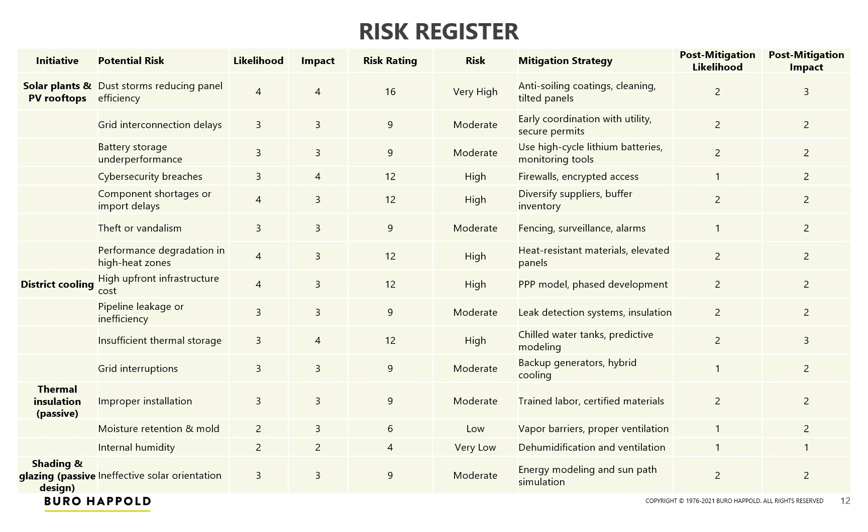We'll start by doing a risk analysis using risk register and risk matrix. A comprehensive risk register systematically identifies potential challenges for each energy initiative. Each risk has a clear mitigation strategy to reduce its impact and likelihood, such as using certified long-life products or implementing secure protocols. Our analysis shows the initial risk distribution with a significant number of risks having high likelihood and impact.

However, with the proposed mitigation strategies, we project a substantial shift towards a low and moderate risk profile, as shown by the post-mitigation distribution. Now we'll talk about the cost analysis of energy initiatives.

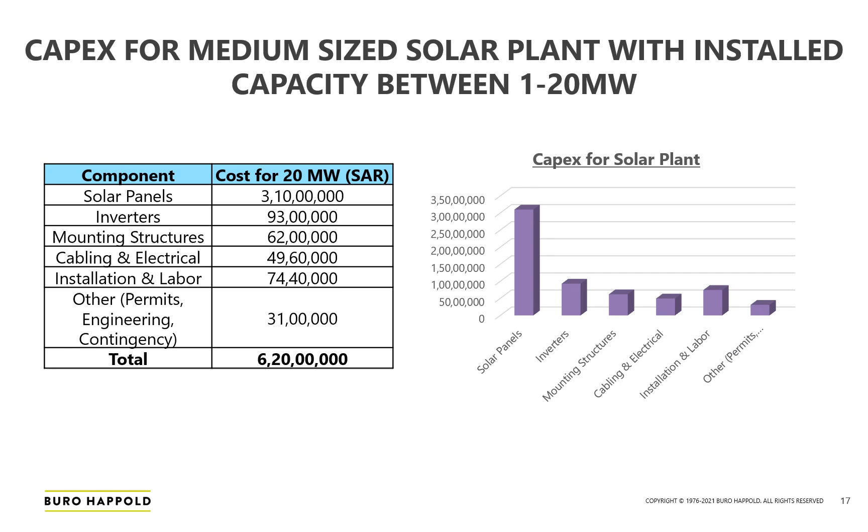To put these initiatives in perspective, a medium-sized solar plant with installed capacity of 1 to 20 megawatts has a total capex around 62 million Saudi riyals and an OPEX of approximately 940,000 Saudi riyals.

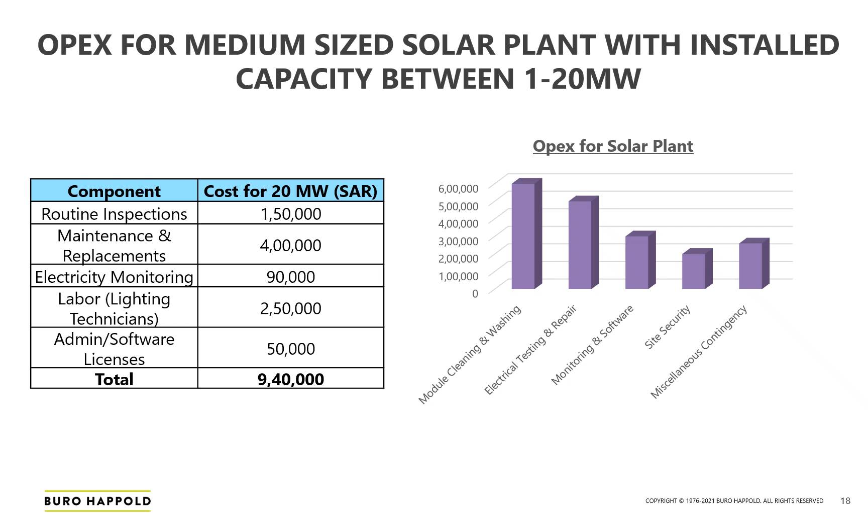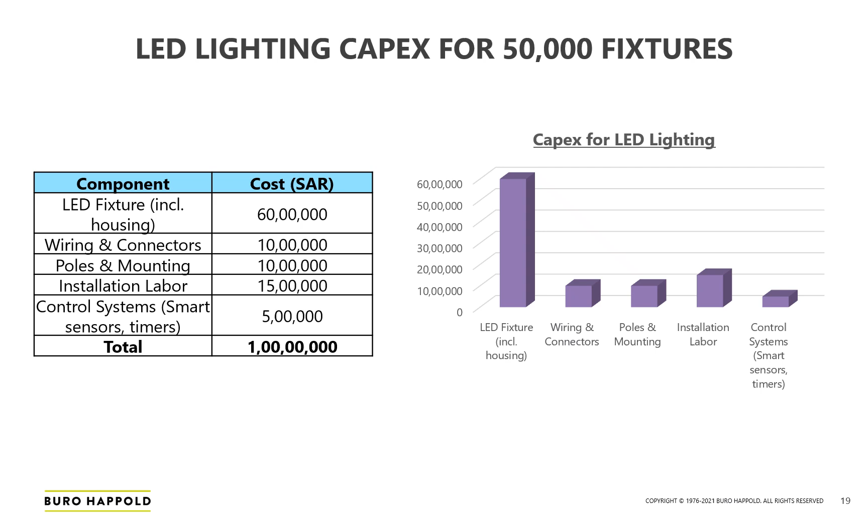For LED lighting, a project involving 50,000 fixtures might incur a total capital expenditure of 10 million Saudi riyals, with an annual operating expenditure of about 5 lakh Saudi riyals for routine maintenance, cleaning, and minor replacements.

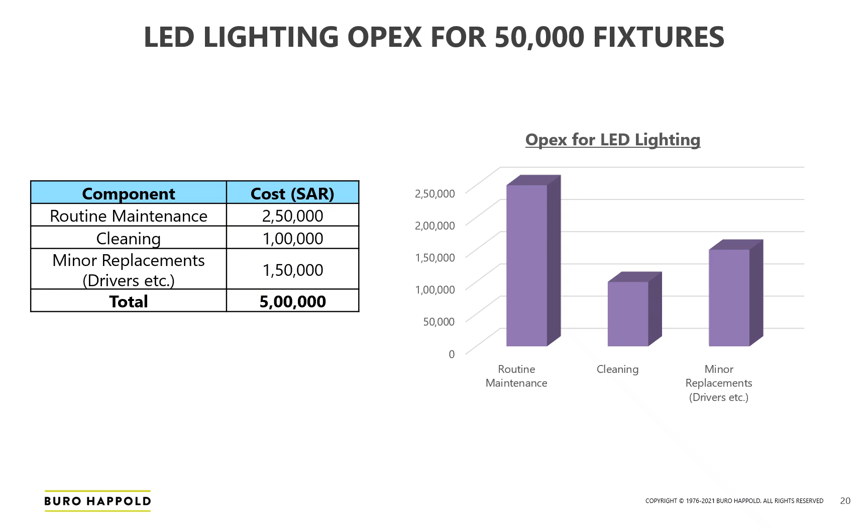This chart visually summarizes the distribution of risk across our energy initiatives. Solar plants and PV rooftops, along with district cooling, currently show the highest number of identified risks, indicating where our focus on mitigation will be most critical.

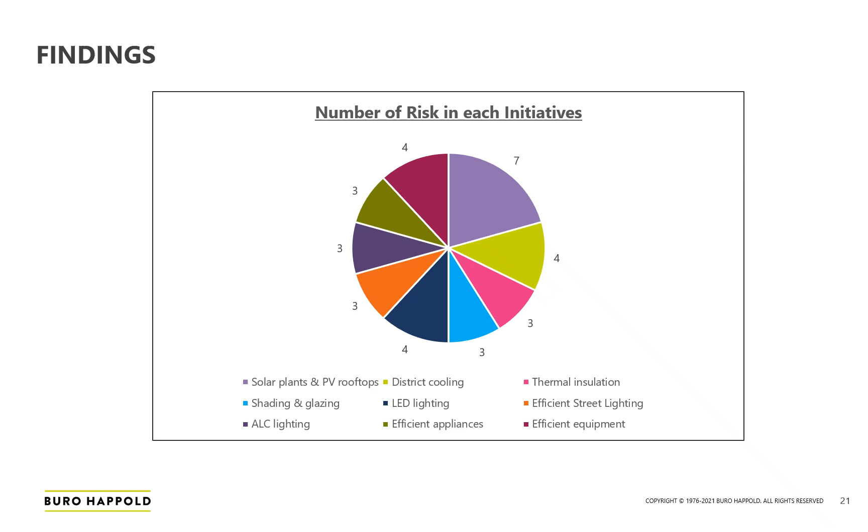Now we'll discuss the potential risks for energy initiatives in brief. Our first risk is grid integration. A primary risk here is increased operational cost for grid operators and potential grid instability leading to blackouts.

To mitigate this risk, Saudi Arabia needs significant investments in smart grid technologies through implementing advanced grid management systems or forecasting tools, or use of hybrid power plants with thermal storage for backups, or lastly deploying utility-scale battery storage, example lithium ion batteries, to store excess solar power and release it when needed.

The total cost of lithium storage battery for a medium-sized plant with solar capacity of 1 megawatt to 20 megawatts, designed for storage of 2 to 4 hours duration, can range up to 660 to 1095 Saudi riyals per kilowatt hour.

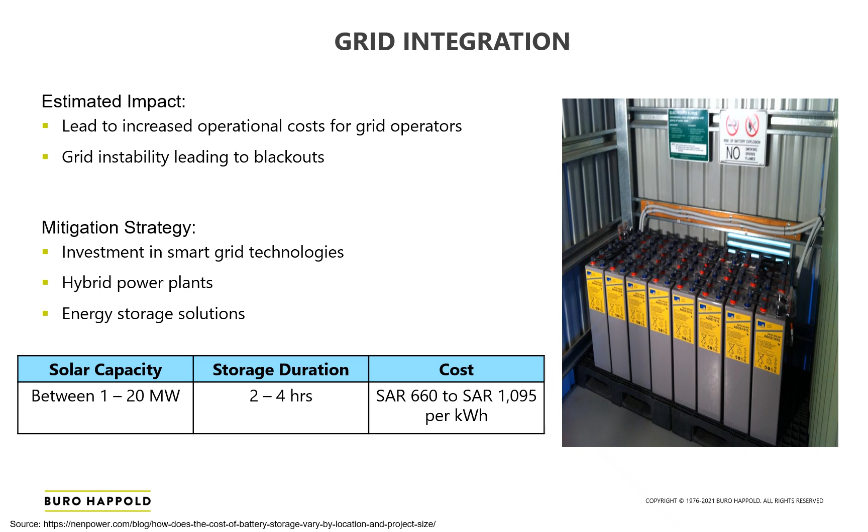Next, for solar capacity, a risk is losing solar power output annually and underperformance against financial projections due to panel degradation. Our solutions include stringent quality control, sourcing from reputable manufacturers, regular performance monitoring, and crucially, using solar simulators for consistent panel testing.

A solar simulator is a specialized laboratory or factory device designed to reproduce the natural sunlight spectrum and intensity for the purpose of testing solar cells and modules. This helps determine a solar panel's electrical performance under standard test conditions. Manufacturers can use them to ensure panels meet specified performance criteria before shipping.

Solar simulators can be classified as Class A, B, and C based on their accuracy. Basic Class C and B simulators can range approximately 73,000 to 367,000 Saudi riyals. However, the high precision Class A simulators can range from 735,000 to 3.67 million.

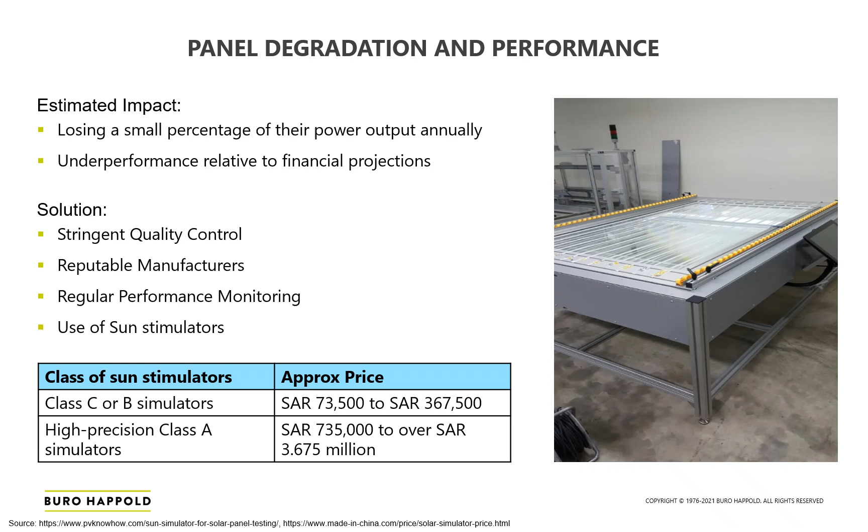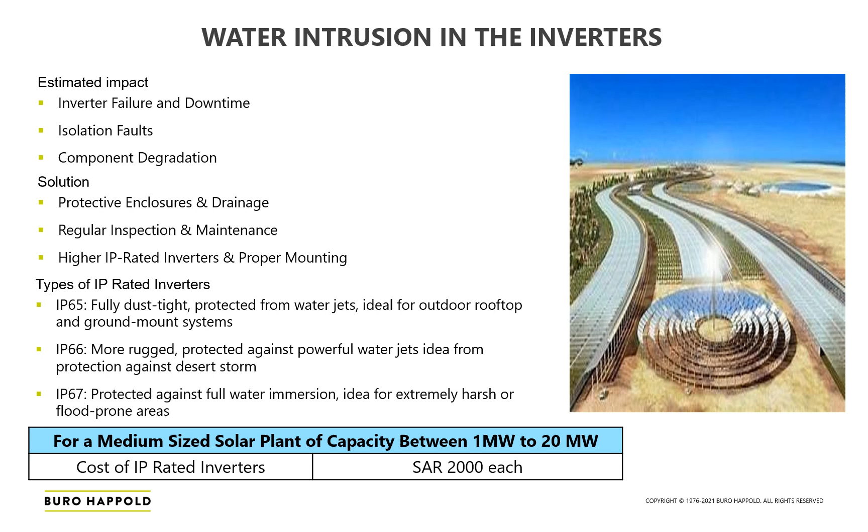Water intrusion poses a significant risk to the inverters, leading to failure, downtime, isolation faults, and component degradation. The mitigation involves selecting higher IP-rated inverters, specifically IP66 for desert storms or IP67 for flood-prone areas, alongside proper mounting and regular inspections. Lastly, a typical IP-rated inverter for a medium-sized plant costs approximately 2,000 Saudi riyals each.

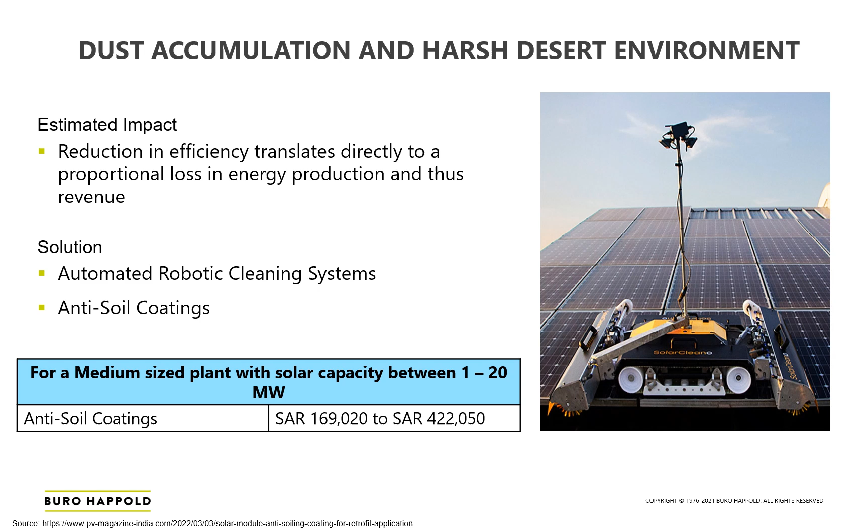Dust accumulation in our desert environment causes efficiency reduction and proportional loss in energy production and revenue. Our solution is twofold: implementing automated robotic cleaning systems and applying anti-soil coatings. For a medium-sized plant, anti-soil coatings could cost between 169,000 to 422,000 Saudi riyals.

Cracks on solar panels reduce power output efficiency and can void warranties. The solution includes using enhanced glass, ensuring International Electrotechnical Commission certification, and utilizing an electroluminescent solar module tester for inspection, with a tester costing approximately 6,000 US dollars.

The EL Solar Module Tester is a crucial diagnostic tool used to identify hidden defects in solar panels that are not visible to the naked eye or through standard visual inspections. It's particularly effective at detecting tiny cracks in the silicon cells, which significantly reduce efficiency and lead to hotspots. It clearly shows broken cells and also reveals any poor electrical connection. Lastly, it also helps in identifying problems like dark cells, which are non-functional areas, and various manufacturing defects.

The tester works by applying an electric current to the solar panel. When electric current flows through the healthy PV cells, they emit light in the infrared spectrum. This IR emitted light is then captured by the high-resolution specialized camera. The captured EL image acts like an X-ray of the solar panel.

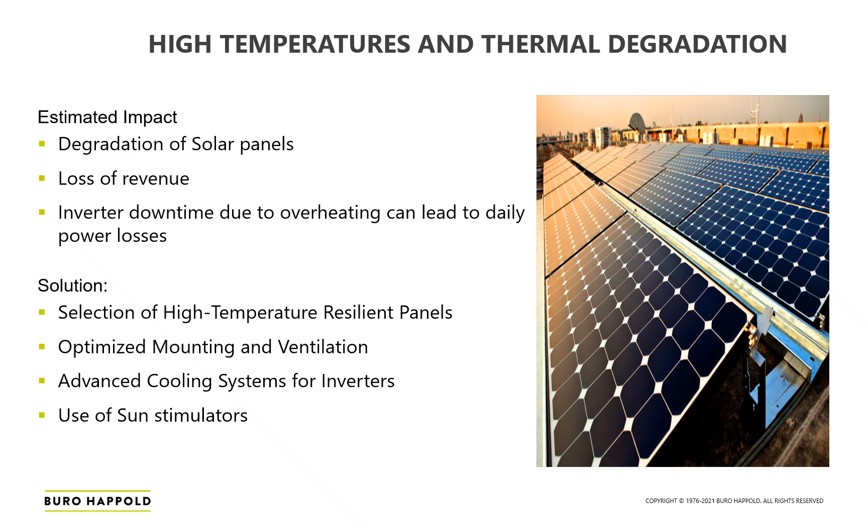High temperatures lead to degradation of solar panels and inverters, resulting in revenue losses and daily power losses due to overheating. Mitigation involves selecting high temperature resilient panels, optimizing mounting and ventilation, and deploying advanced cooling systems for inverters, complemented by the use of sun simulators.

Cybersecurity is a critical risk, potentially causing operational downtime, significant financial losses, reputational damage, and grid stability risk. Our defense includes implementing robust cybersecurity architecture, conducting regular audits and penetration testing, and investing in continuous employee training and awareness.

Specific to LED lighting, a major risk is operational failure and reduced energy savings due to lumen depreciation or sensor failure caused by harsh environmental conditions and dust. This leads to degradation, loss of brightness, and reduced output. Mitigation includes deploying automated cleaning systems and specifying certified long life, robust EX-proof LED lights designed for extreme conditions.

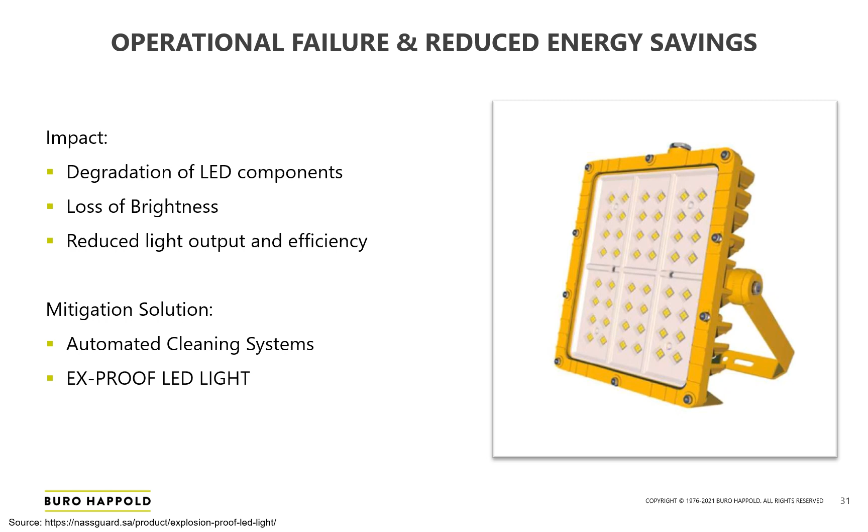These LED lights are built with high strength, corrosion resistant material to withstand the harsh conditions. LED technology provides bright illumination with low energy consumption, reducing operational cost. It is designed to minimize heat emission, reducing risk of overheating. Lastly, it's built for longevity, reducing maintenance frequency and cost.

Lighting also carries the risk of light pollution impacting human health and ecosystems. Our solution is intelligent lighting design and fixture selection, emphasizing shielded and directed light like the Schréder Avento street lighting solution to ensure light goes only where it is needed.

Today, I'll present our key findings on material sustainability initiatives in Saudi Arabia. As part of our risk management analysis, I focused on three critical materials initiatives that align with Vision 2030 and offer significant environmental benefits. Let me start with our three core initiatives.

First, recycled steel using electric arc furnace technologies with scrap metal versus conventional steel, with a 44 to 48% cost reduction and 70% CO2 emissions reduction. The Saudi scrap export ban ensures reliable local supply. Second, recycled concrete involves reusing demolition waste as aggregate. SIRC has invested 160 million SAR in this sector, achieving 5 to 10% CO2 reduction with optimal performance using 25% recycled concrete aggregate.

Third, local sourcing targets the 160 plus billion-dollar Saudi building materials market, reducing transport emissions by 0.05 to 0.1 tons CO2 per ton. While it has strong Vision 2030 government support, we face supply capacity constraints that need addressing. Our risk analysis identifies key challenges across all initiatives.

For recycled steel, market price volatility is mitigated through long-term supplier contracts and hedging mechanisms. Quality inconsistency risks are managed through enhanced quality control systems and supplier certification programs. Local sourcing faces supplier capacity limitations, which we address through development programs and capacity building initiatives. Recycled concrete processing costs are managed through economies of scale and technology advancement.

The financial structure shows recycled steel requiring 50 million CAPEX with 50 million annual OPEX, delivering strong returns. Local sourcing needs 75 million CAPEX for supplier development with 20 million OPEX. Recycled concrete requires 35 million CAPEX for processing equipment with 18 million annual operating costs. Total portfolio investment is 160 million SAR, generating substantial positive NPV.

I'm Mohammad Hadi and I'll be presenting this assessment of sustainability initiatives and my focus would be on mobility. So firstly, let's go through the executive summary of my assessment. So this report consolidates the major risks associated with implementing the mobility initiative across the Kingdom of Saudi Arabia.

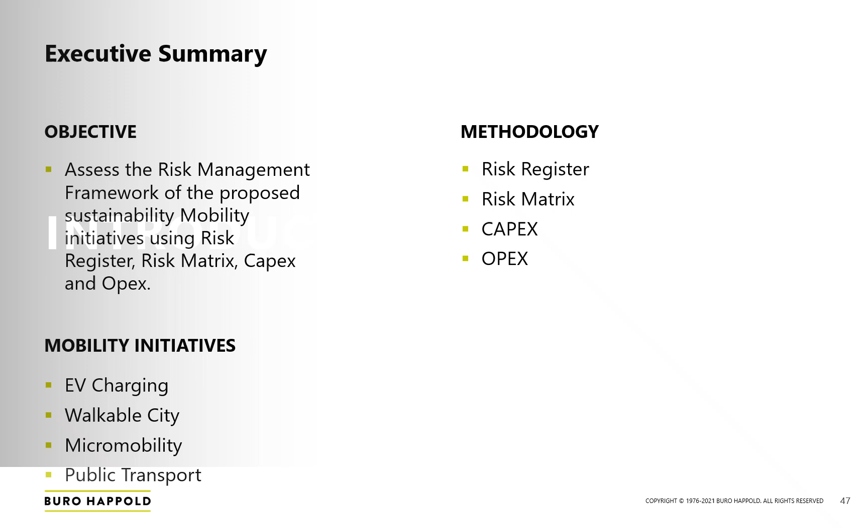So our objective is to assess the risk management framework of the proposed sustainability mobility initiative, and we will be using risk register, risk matrix, and capex and opex. So the initiatives which we are going to assess are EV charging, walkable city, micromobility, and public transport. Let's move on to our introduction.

So, why are mobility initiatives important? So, firstly, it aligns with Vision 2030. The Kingdom of Saudi Arabia has a Vision 2030 which calls for diversifying the economy, enhancing quality of life and reducing dependence on oil, and mobility initiatives are cornerstone to modern infrastructure to promote sustainable cities, even improve public health.

Then we have environment sustainability, in which mobility initiatives such as EV, micromobility, and walkable public transport will all reduce greenhouse gas emission and air pollution and fossil fuel consumption. Then the traffic congestion and urban efficiency. There are major cities like Riyadh and Jeddah which face growing congestion due to urban sprawl and car dependency. So the public transport and walkable infrastructure would really help to ease the congestion.

And then there's public health and livability, where active mobility options would improve population health and encourage social cohesion, such as encouraging walking and cycling. As we can see, these all have benefits. So, firstly, our carbon emissions are going to be reduced, and there's going to be job creation in transport services, clean tech and maintenance.

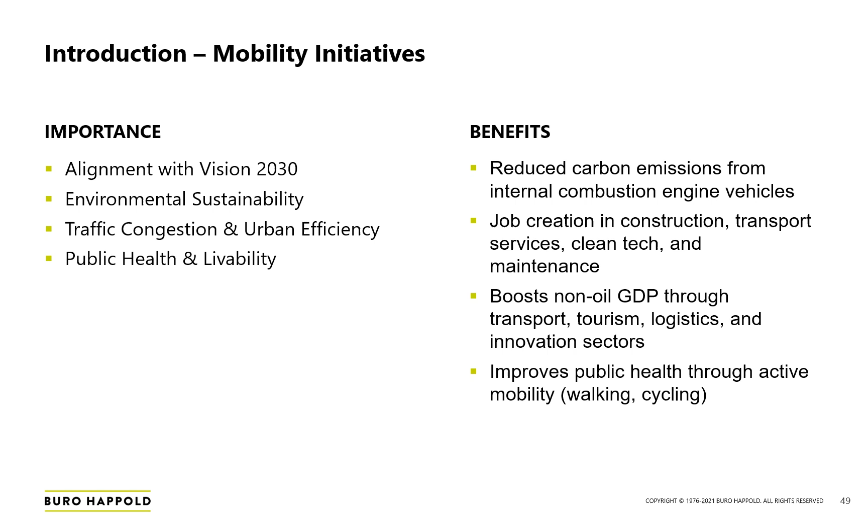And then we are also trying to boost non-oil GDP through transport, tourism, logistics, and innovation sector. Then it will also improve the public health, as I said before, via walking. It will encourage walking and cycling. So moving on to my risk analysis, I'll be discussing two components in this part. It will be risk register and risk matrix.

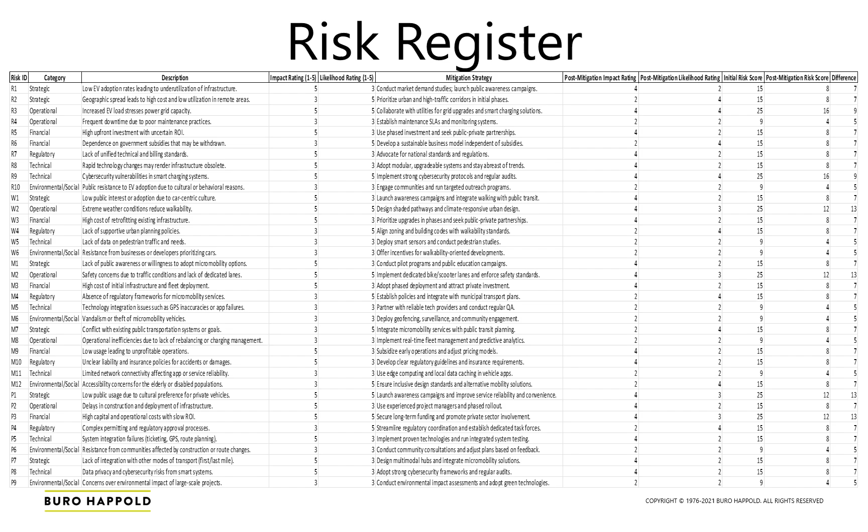Quickly, so this here is the risk register for all my four initiatives. In the risk IDs, R represents the EV charging, W represents the walkable city, M represents micromobility, and P represents public transport. So here I have risk IDs, risk descriptions, likelihood and impact, and then their mitigation strategies. Then I have post mitigation strategies, and we can also see the initial and post mitigation risk score and the difference in that.

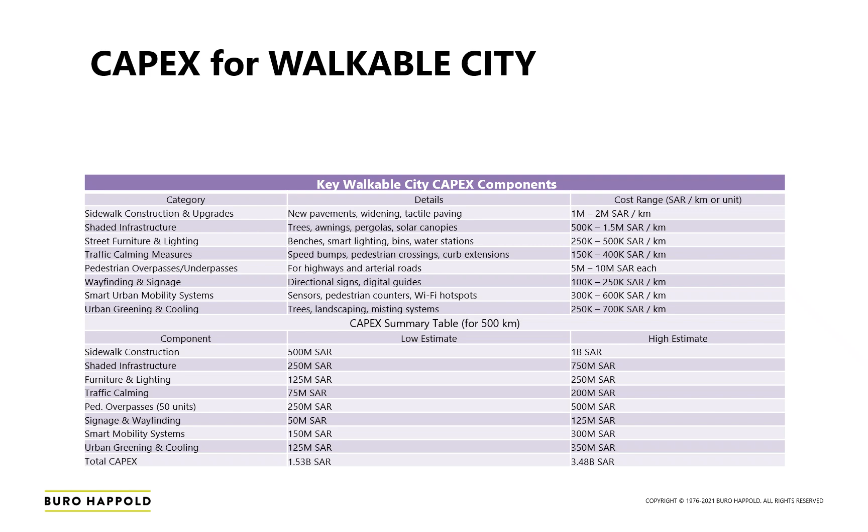So this right here is capital expenditure for walkable city. So first we can see that there are key walkable components, each listed differently, and then we can see the capex summary table. So this is basically for 500 kilometers. I've assumed that I'm making a walkable network across KSA for 500 kilometers. So this cost is for that, and we have a low estimate and a high estimate. So the total capex cost for making a walkable city in the Kingdom of Saudi Arabia of 500 kilometers varies from 1.53 billion Saudi Riyal to 3.48 billion Saudi Riyal.

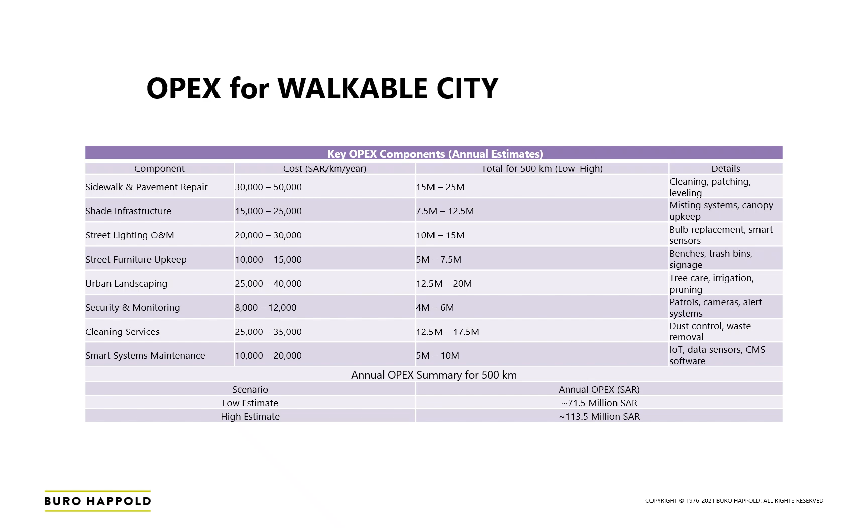So here is the OPEX for walkable city, and we can see each component separately with cost in Saudi Riyal per kilometer per year, and also total for 500 kilometers. The details for each component are also given, like what type of maintenance, for example, in pavement there can be cleaning, patching, or even leveling. So the annual OPEX summary for 500 kilometers, the lowest estimate is 71.5 million Riyal, and the highest is 113.5 million Riyal.

So this right here shows the OPEX for different cities like Riyadh, Jeddah, and Dammam. So say we need to make 200 kilometers of walkable track in Riyadh. What is it going to cost, the OPEX? And it even shows the cost of each different component and the low and high cost. So we can take a look and plan accordingly.

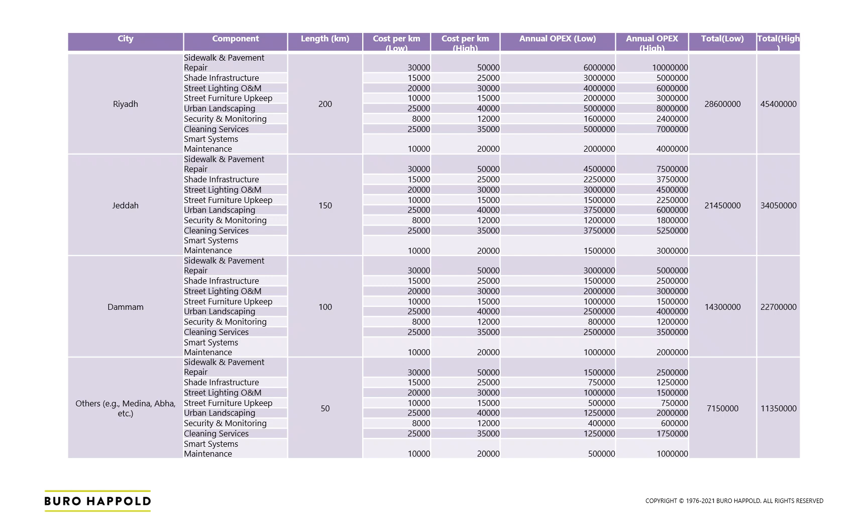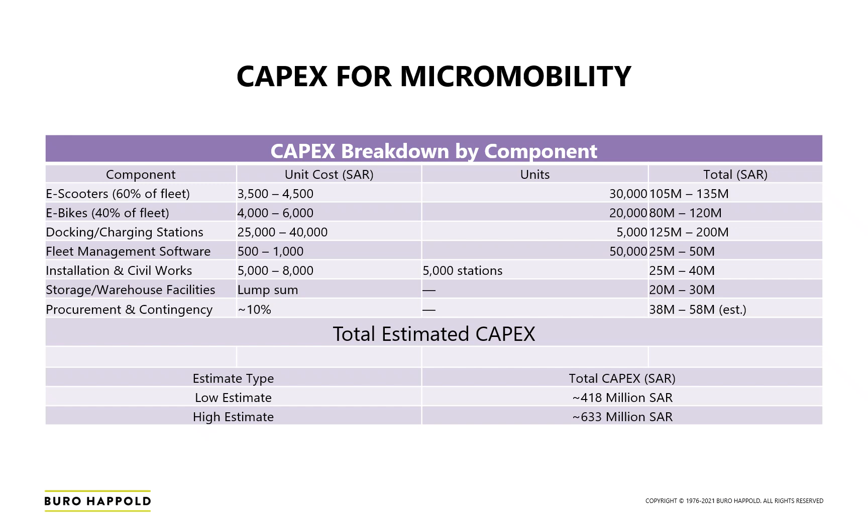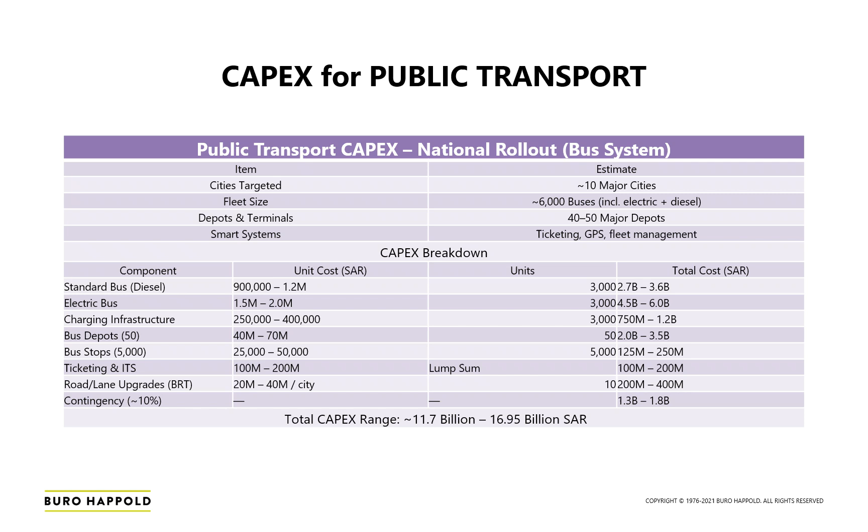So this is capex for public transport. So we are going to target 10 major cities with 6,000 buses and 40 to 50 major depots with ticketing, GPS, and fleet management. Then there's a breakdown with each component, per unit cost, total units, and the total cost. So the capex cost for public transport is going to range around 11.7 billion Saudi Riyal to 16.95 billion Saudi Riyal.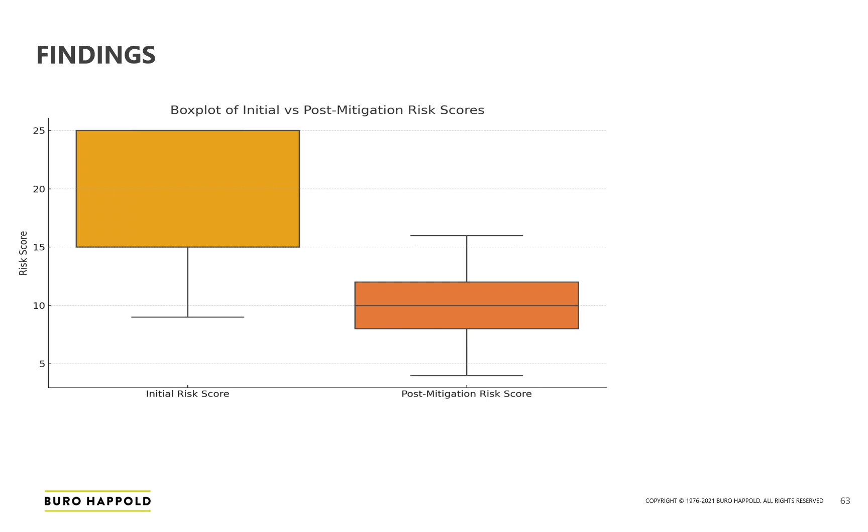So this bar chart represents the total cost which is required to mitigate the risks according to their categories. So we see that operational risk requires the most cost to be mitigated. As we can see, it's more than 1,000 million riyals, and then strategic is the lowest, requiring around 300 million riyals, and financial requires around 650 million riyals.

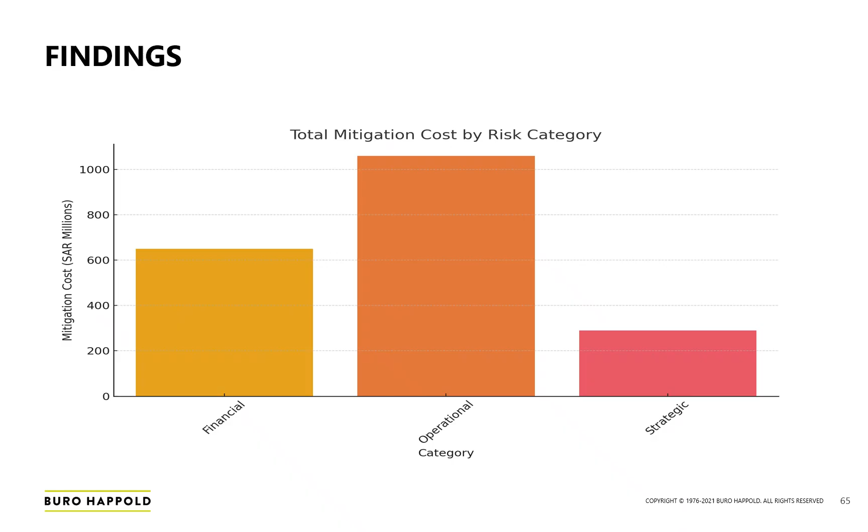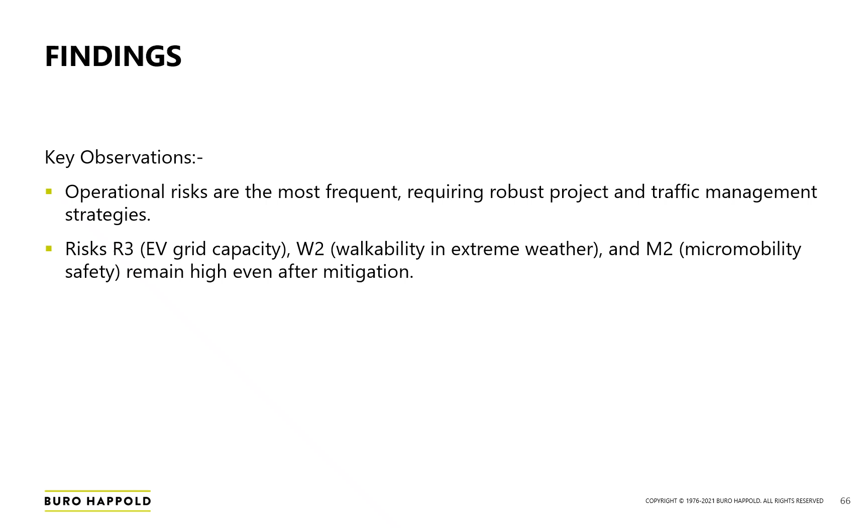We will be discussing key observations. So, firstly, operational risks were the most frequent ones, which also required robust projects and traffic management strategies. And then there were three risks, R3, W2, and M2, which remained high even after mitigation. And further, we will be discussing how to mitigate these risks and the cost required to mitigate them.

So, moving on to my final part, let's talk about potential risks for mobility initiatives. Let's talk about my first initiative, EV charging. Basically for risk R3, which was a critical one, as EV adoption increases, the demand for electricity will surge, especially during peak hours. If the grid is not prepared, this could lead to blackouts, voltage drops, or inefficient power distribution. So in order to mitigate it, we had to collaborate with utilities for capacity planning and infrastructure upgrades.

So in order to do that, we could deploy smart charging solutions that manage charging in off-peak hours and balance loads. Also invest in grid monitoring and storage solutions, for example, backup batteries or even a demand response system. As you can see, in order to mitigate this risk, an estimate of 3.0 million Saudi Riyal is predicted, which includes grid impact, smart charging software, limited infrastructure reinforcements, and partner

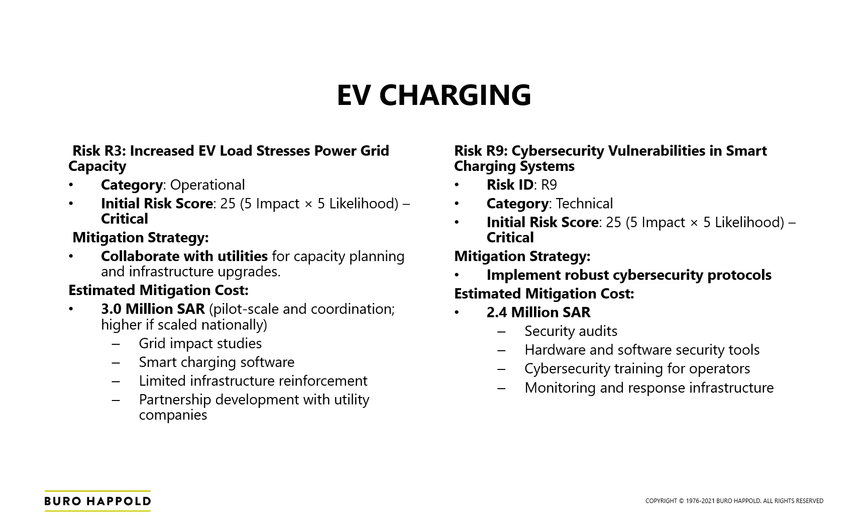development with utility companies. So for the second risk, as EV charging networks become digitally connected, they become targets of cyber attacks that disrupt services, steal user data, or compromise national energy infrastructure. So this was also a 25-rating risk. In order to mitigate it, we had to use end-to-end encryption, regular security audits, firewalls, and intrusion detection systems. So for mitigation, 2.4 million Saudi Riyal was expected, which included security audits, hardware and software security tools, cybersecurity training for operators, and monitoring and response infrastructure.

So this right here is Walkable City, my second initiative, and it had only one critical risk. As we all know, in Saudi Arabia there's extreme heat, often 45 degrees Celsius, and intense sun exposure with occasional sandstorms, which can make outdoor walking very uncomfortable or even unsafe for extended periods. So this undermines public use of pedestrian infrastructure, reducing the return on investment and defeating the purpose of sustainable urban mobility. So in order to mitigate that, we have different components like shaded infrastructure, heat-reflective pavements, misting and cooling elements, urban lighting, and climate designs.

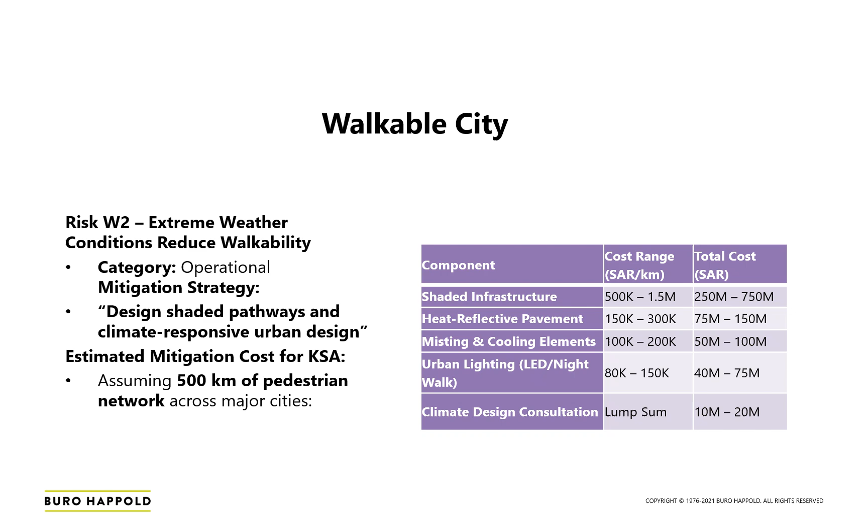The cost range is per kilometer, and the total cost is for 500 kilometers. So in order to mitigate this risk, the expected cost is around 425 million to 1.095 billion Saudi riyals. This cost ensures walkability is viable year round, even during peak summer months, and it is critical to be adopted in KSA. So moving on to my third initiative, micromobility, it also had one critical risk.

So in fast-growing Saudi cities like Riyadh and Jeddah, urban streets are dominated by high-speed vehicle traffic. Introducing micromobility like e-scooters or e-bikes without protected infrastructure could lead to accident risk, public fear, and low adoption, even liability issues for operators and opposition from road users and regulators.

So in order to mitigate it, we could build protected lanes, establish clear road signage, and enforcement tech. Also, we could use public safety campaigns and training. Also, we could use a policy framework and traffic law integration. So I've also put costs for each initiative per kilometer and the total cost, which is for around 1,000 kilometers of micromobility lanes, rolled out in 10 major cities.

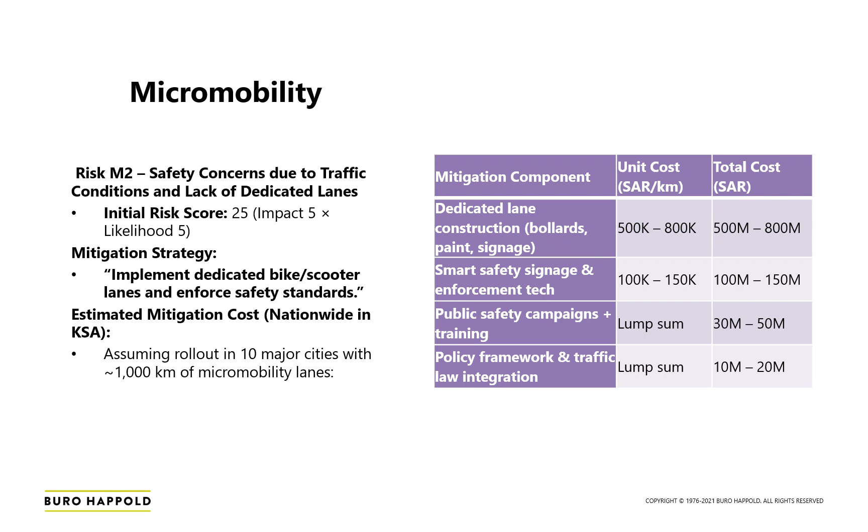So moving on to my last initiative, which is public transport. So this had two critical risks. So firstly, talking about P1, which was low public usage due to cultural preference for private vehicles. So we know that Saudi has a long-standing car-oriented culture, which is enabled by low fuel cost and road-dominant urban designs. Also, there's a social preference for driving. So without strong incentive or public appeal, public transport would remain underutilized despite infrastructural investments.

And then for the second risk, P3, which is high capital and operational costs with slow return on investment. So we know that there's large upfront investments in fleet and infrastructure, and operations may not yield quick returns. So public transport in early phases may run a deficit. Without proper planning, this might become fiscally unsustainable.

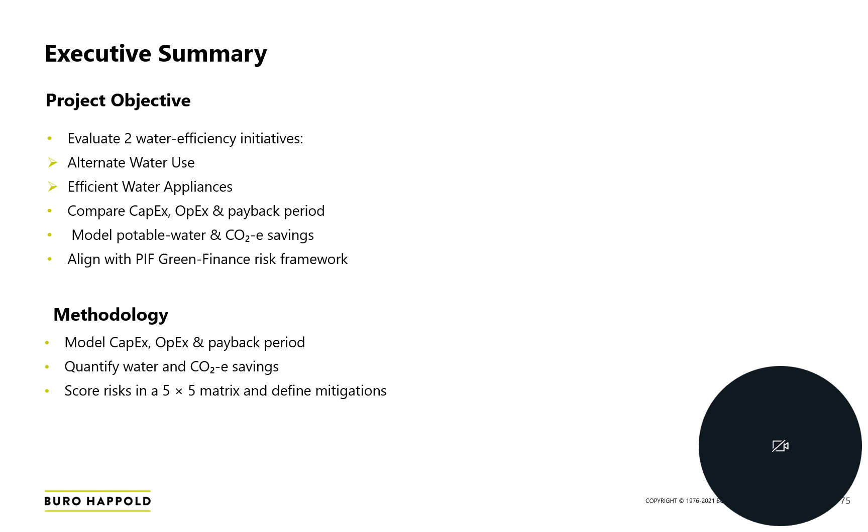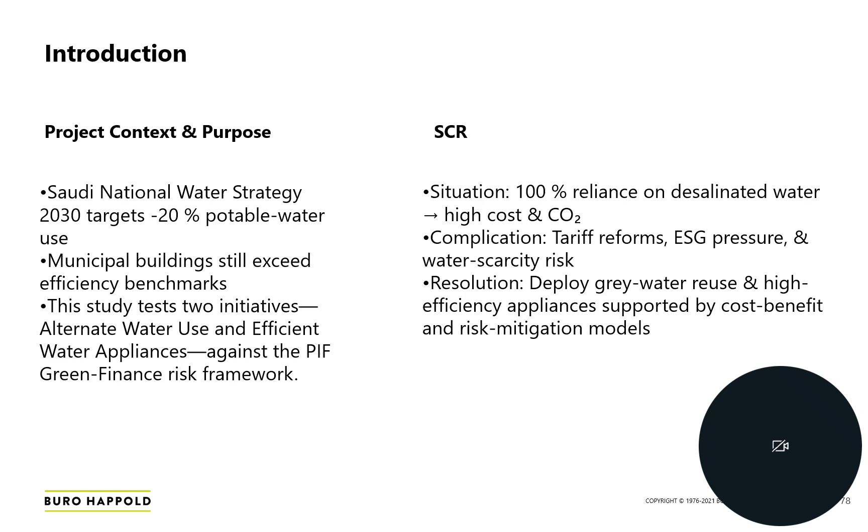Here are the two initiatives I will discuss. Under Saudi Arabia's Vision 2030, potable water use must fall by 20%. Yet our municipal buildings still rely 100% on energy-intensive desalination. Today we will explore two targeted solutions: grey water reuse and Energy Star appliances, through cost-benefit analysis and a risk framework to ensure both financial viability and environmental impact. We reference the PIF framework. It sets thresholds on CO2e abatement cost less than 2,500 Saudi Riyal and requires a robust risk management process.

For alternate water use, we modeled CapEx and OpEx and calculated payback, converted water savings into CO2e abatement, scored risk and defined mitigations. The tools used: our spreadsheet, risk matrix template, PIF checklist. For efficient water appliances, we modeled CapEx, OpEx, and payback, quantified water and energy savings to CO2e abatement, scored and mitigated supplier and user acceptance risk. For tools used, we used spreadsheet model CapEx, OpEx, and payback, risk matrix template 5 by 5, PIF Green Finance checklist.

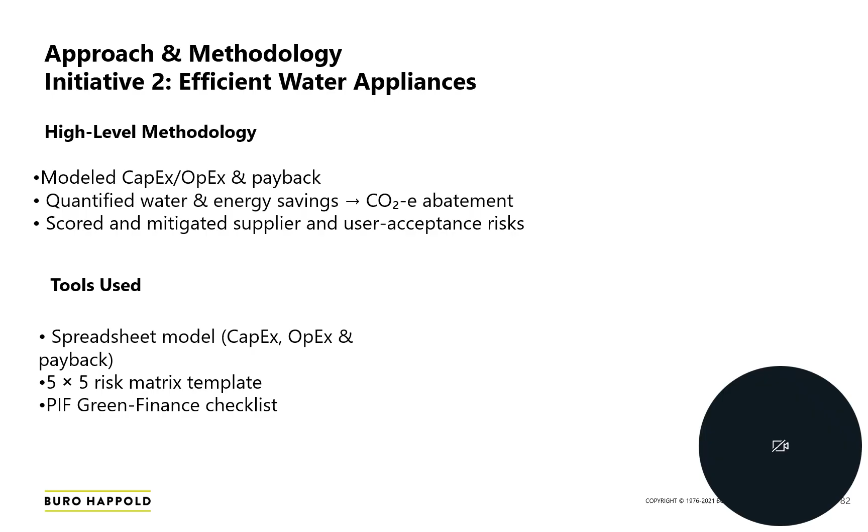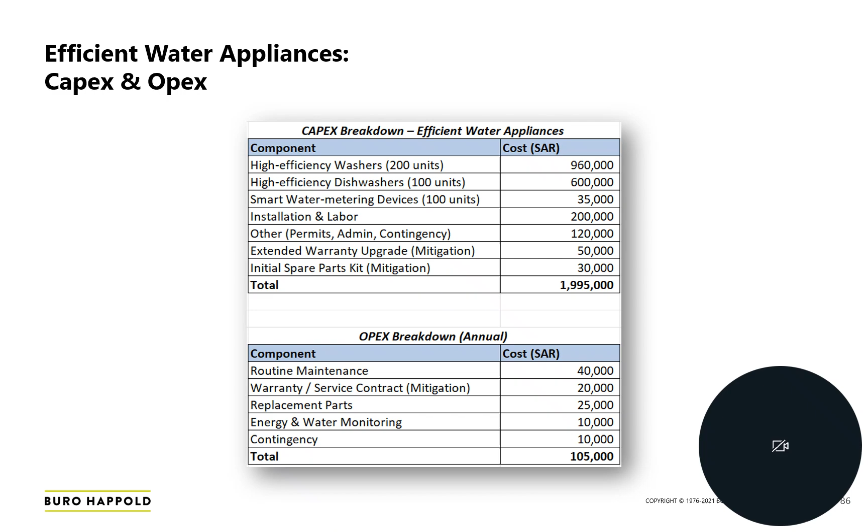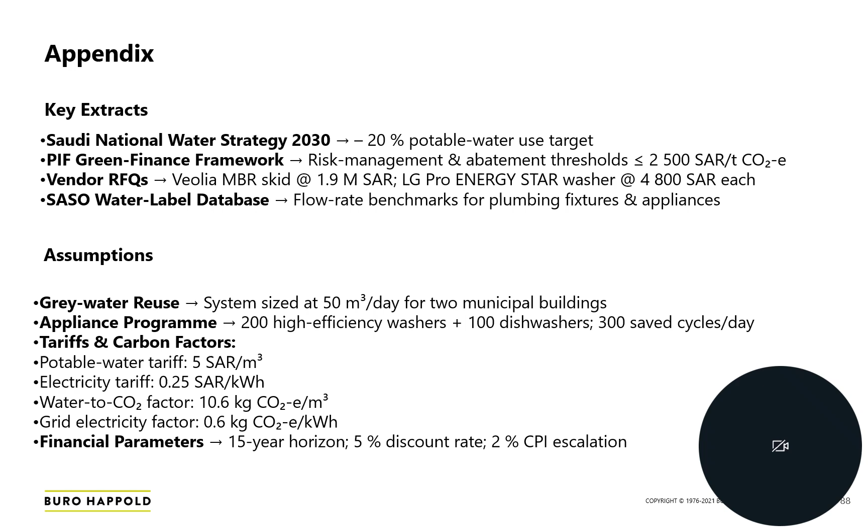On the appendix slide, you will see three supporting sections: key extracts from the National Water Strategy 2030, PIF guidance and vendor quotes, our core assumptions on system sizing, tariffs, carbon factors and finance, and the exclusions like network losses, tariff changes and user behavior that we have scoped out. These ensure full transparency behind our analysis. We identified 30 tailored risks across the five water measures, scored them for likelihood and impact, and proposed mitigation actions for each.